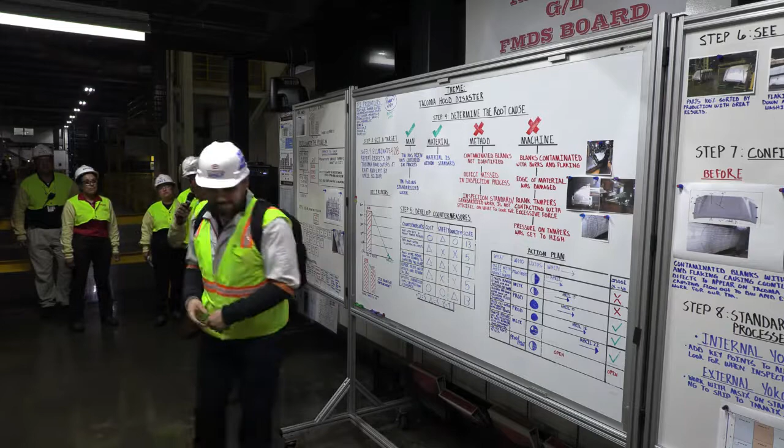My name is Roger Lopez, production group leader here in Stamping Shop. Our team safety commitment is we'll always be aware of our surroundings during Genchi Genbutsu activity, and always be aware of team members in the area.

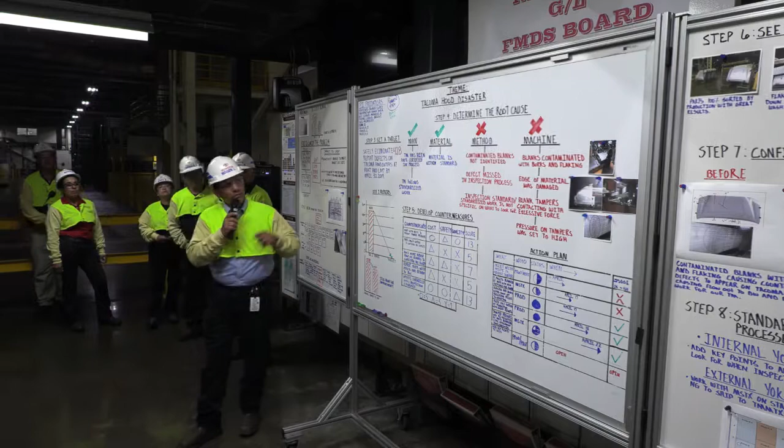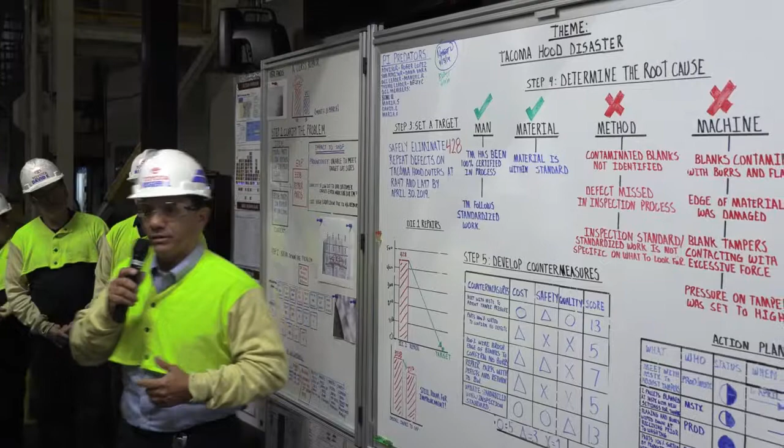So today our QCC, our quality circle name is PI Predators, and our theme is Tacoma Hood Disasters. This QCC was actually driven by team members on the floor. Our PI team member, which is the press inspection, is really involved with our repairs in the shop, and there was a slight concern about excessive repairs in a certain period of time. So we took a look at that and targeted our QCC in that direction.

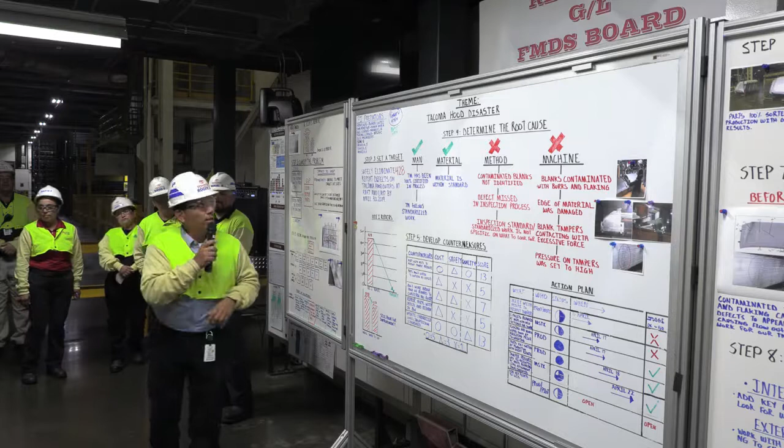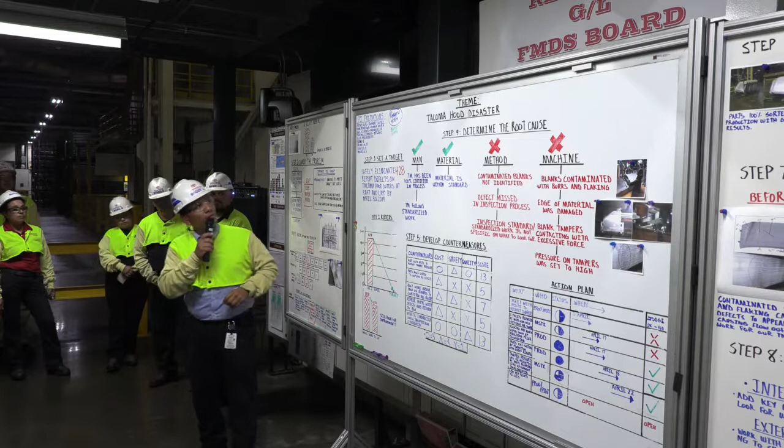Having said that, our team, myself, like I said, is the advisor. We had our sub-advisor, Dana Vada, who's our other group leader. QCC leader is Manuel Angel. Our theme leader is Becky Calderon, who could not be here today, she had to go on a family emergency. So Manuel volunteered to take her slides to report out, so thank you, Manuel, for that. QCC members are Ronnie Uvedo, Maria Zambrano, David Espinosa, and Maria Felitello.

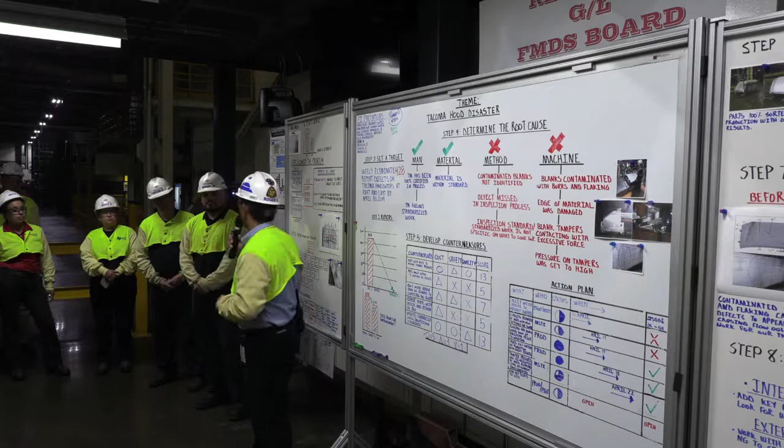So with that, I'll go ahead and turn it over to Manuel to go ahead and kick off our QCC presentation. Thank you, Roger. Good afternoon, thank you for being here for our QCC.

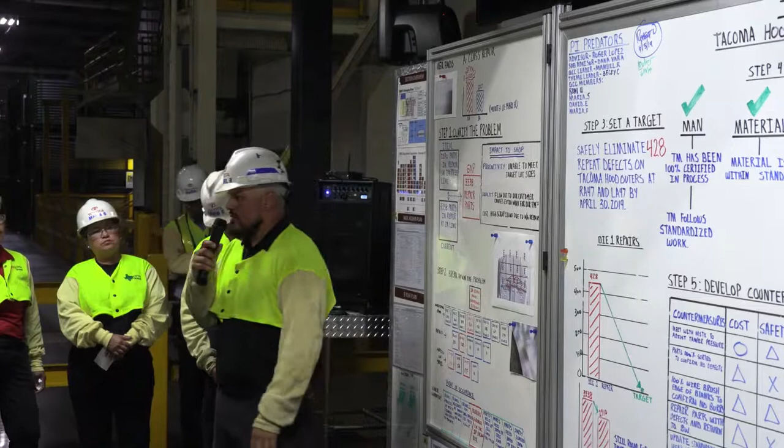So like Roger said, this is team member driven, right? So what we noticed is our 2A and 3A repairs were really high in the shop. Here we have our 2A repair, 3,338 panels in repair. Our 3A repair was 2,827 panels. So we're going to attack our highest hitter, which is our 2A repair, 3,338 panels.

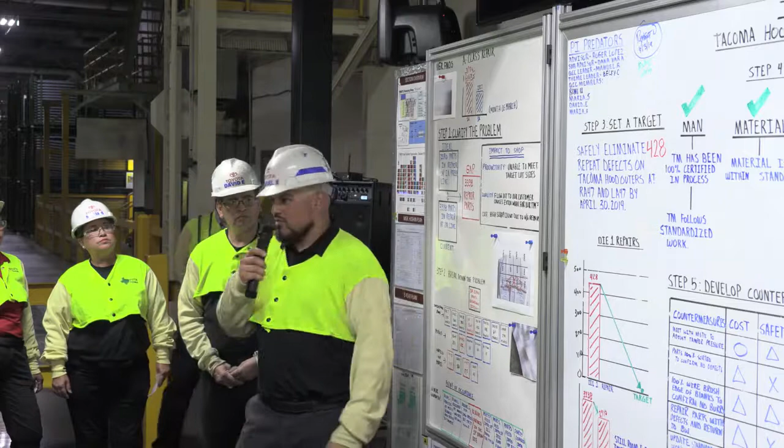Moving on to step one, clarifying the problem. Currently, ideal, we want 0 parts in repair on 2A press line. Currently, we have 3,338 parts, which leaves us a gap of 3,338 parts. Impact to the shop: our productivity, we're unable to meet target lot sizes. Quality flows out to our customers, causing extra work for our team members. Cost: high scrap count due to no-good repairs.

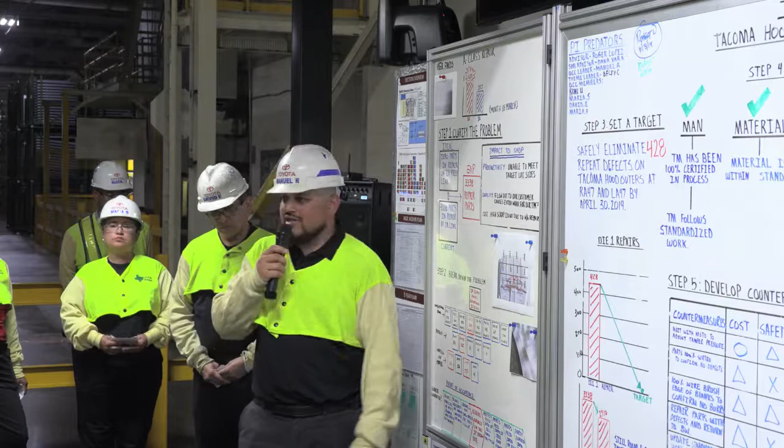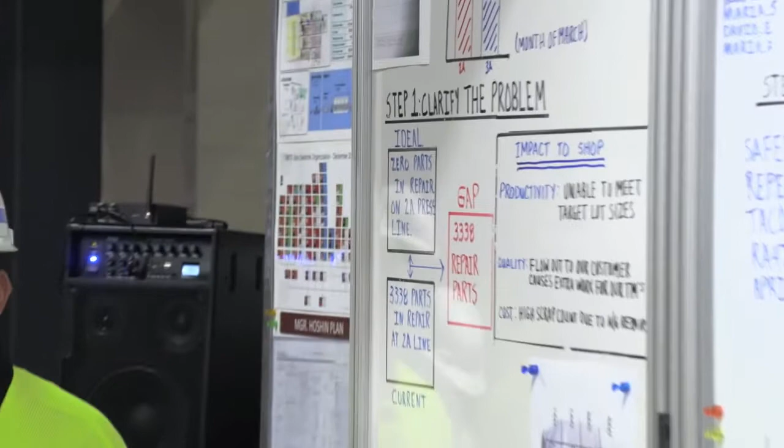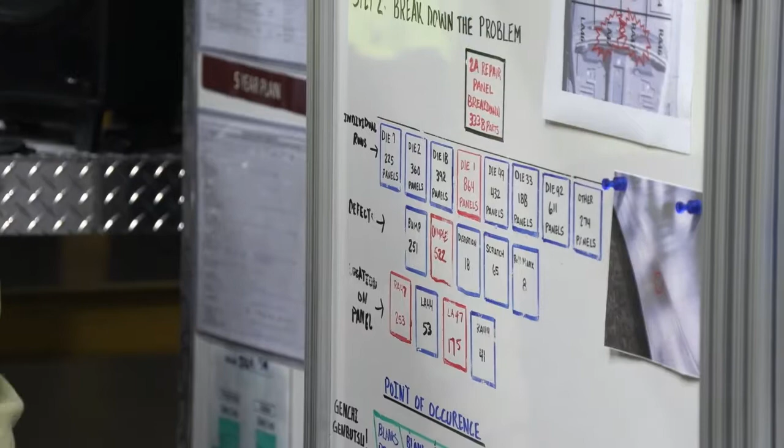Moving on to step two, breaking down the problem. As I mentioned, our 2A repair panel breakdown is 3,338 parts. We broke that down into individual runs. We noticed our highest hitter was actually die one, which is our Tacoma Hood outer, at 864 panels in repair. So we broke it down even further into actual defects appearing on the panel: bumps, dimples, distortions, scratches, and roll marks. Our high hitter was actually our dimples at 522 panels on Tacoma Hoods.

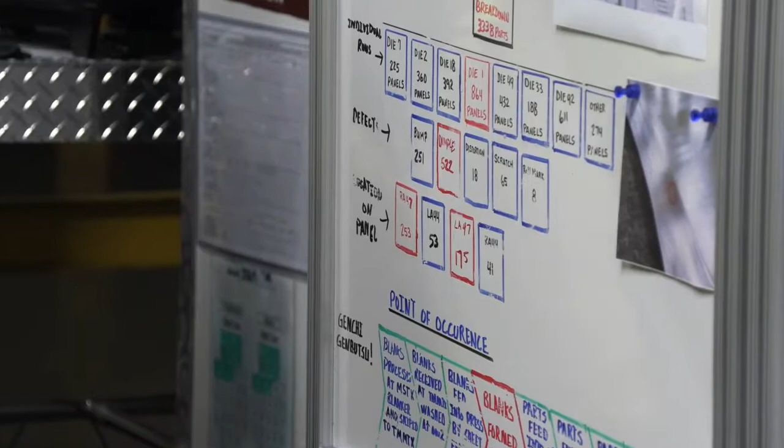We took it a step further and went for the actual location on the panel where these defects were appearing. We had RA47 and LA47 at 253 and 175. If you notice right here on our graph, these are our locations on the panel where we're getting these defects on the Tacoma Hood.

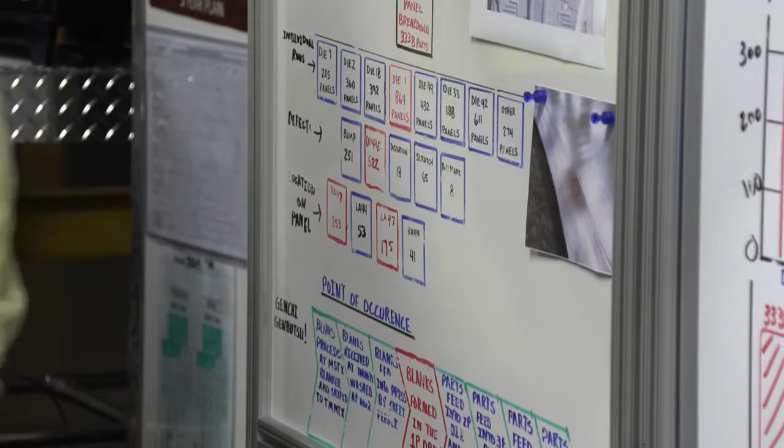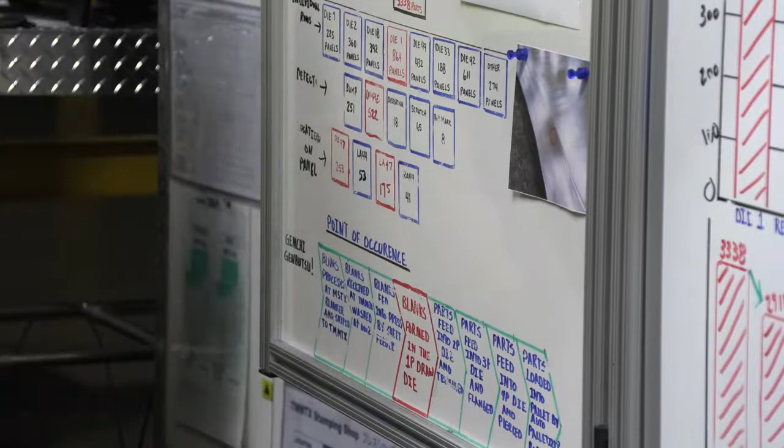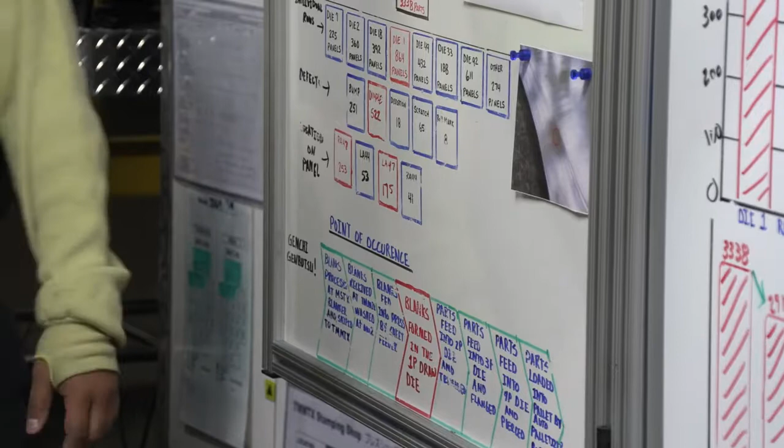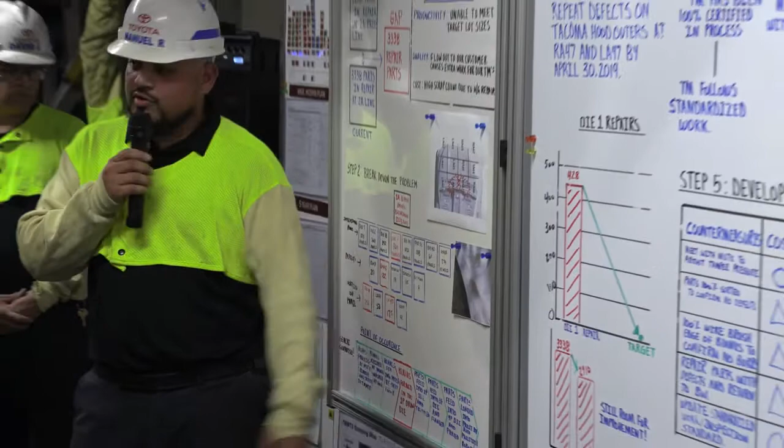Moving on to our point of occurrence. The first thing we did, we went to the blanking process at MSTX blanking line, which is Millennium Steel, our on-site supplier. Next, we went to our blank receiving at TMMTX and wash at AW2. After that, we went to the blank being fed onto our sheet feeder. Next, we had our blanks formed in our 1P draw die. After that, we went to our parts being fed into the 2P draw die, 2P trim. Next, we went to our 3P, 4P, and last but not least, our parts being loaded onto our pallets by our auto palletizer.

So after using Genchi Genbutsu, we were able to find our point of occurrence was when our blanks are being formed in our 1P draw die. Now I'll hand it over to David for step 3.

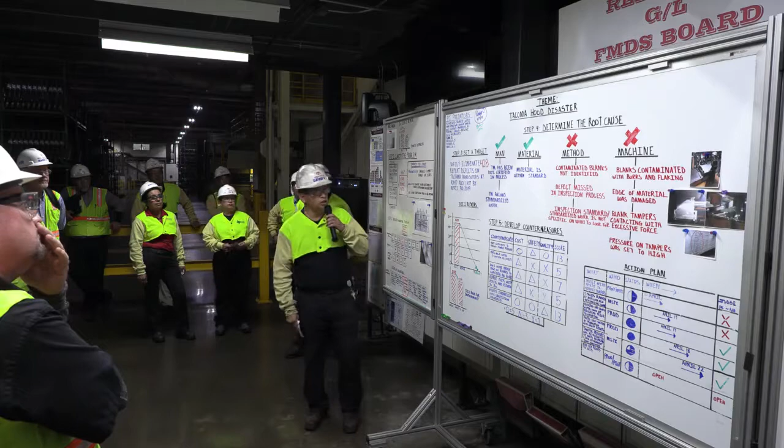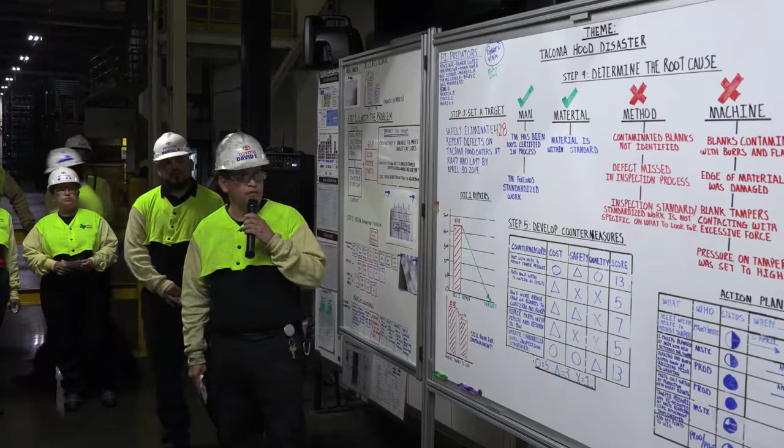Good afternoon. Step 3, set a target. We did: to safely eliminate 428 repeat defects on Tacoma Hood outer, by location RA47 and LA47, by April 30th, 2019. On die 1 repairs, from 428 parts, we're bringing it down to 0. 0 is our target.

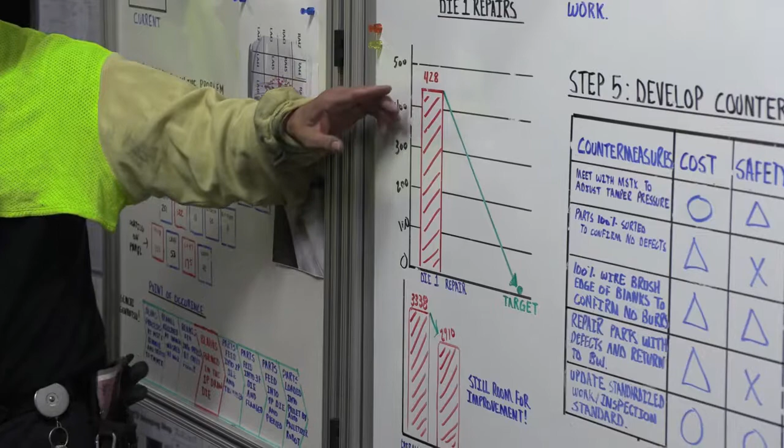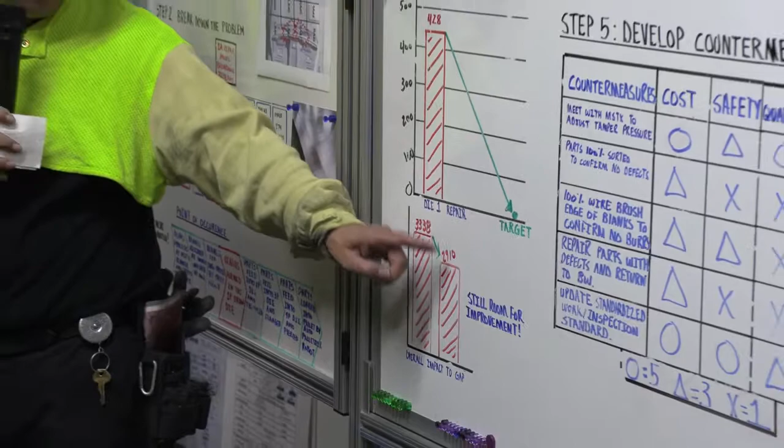Overall impact to gap is from 3,338 down to 2,910 parts, and that's just under 13%.

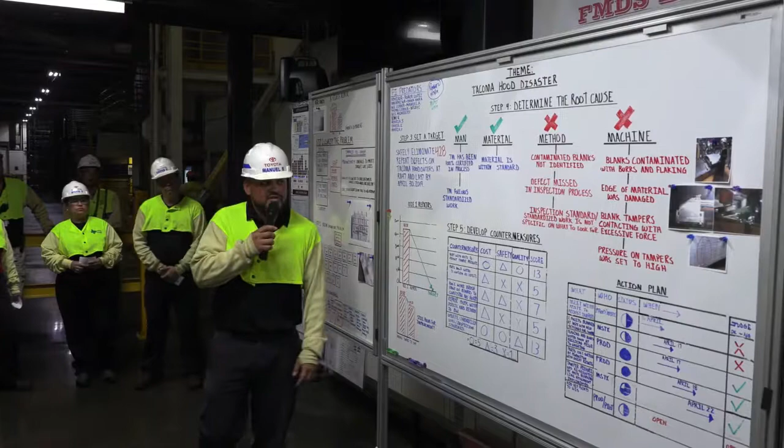So of course we went with our 4 M's. The first one we have is our man. All team members are 100% certified in the process. Next, we looked at our team members following standardized work, and that was good as well.

Next, we move on to our material. So our material is within standard.

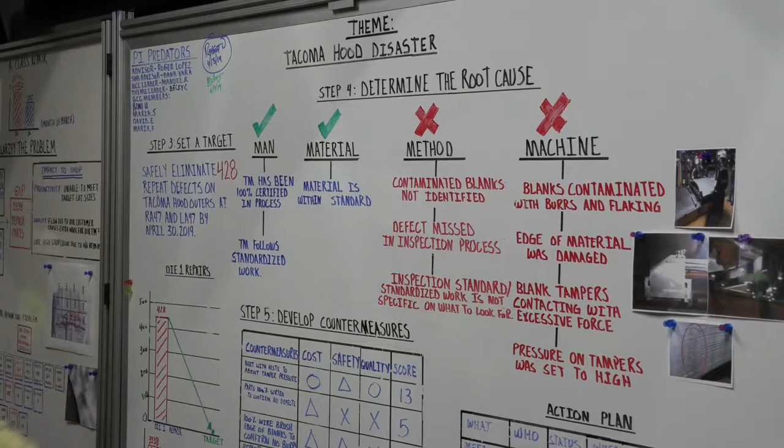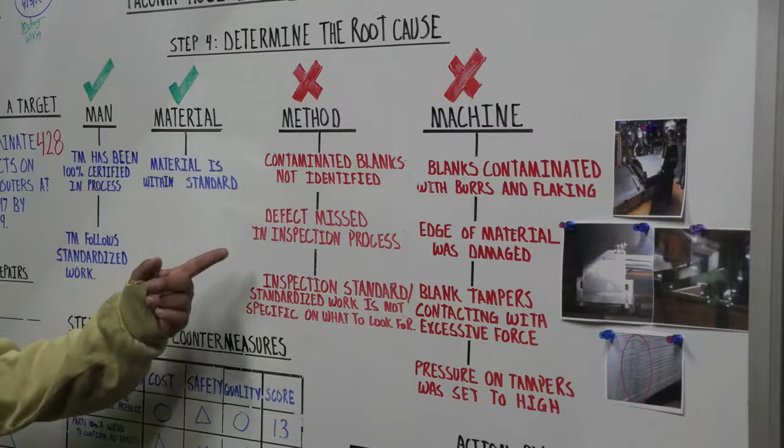Next, we move to our method. So we did find that we had contaminated blanks not identified. Why was that happening? Because the defects were missed in the inspection process. Why did that happen? Because the inspection standards / standardized work was not specific on what to look for.

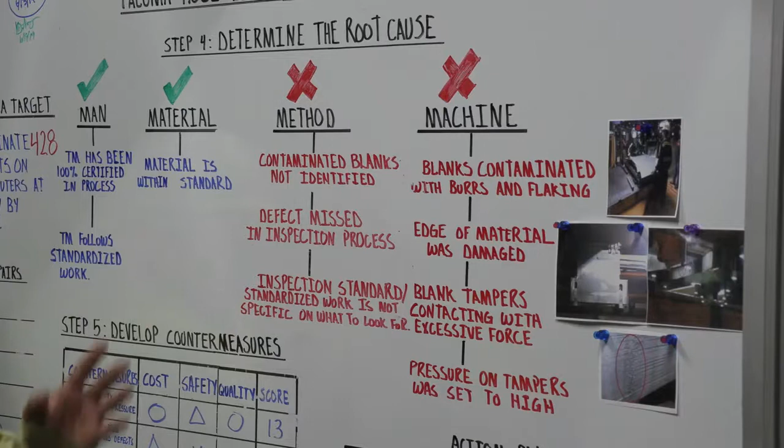So now that we stopped there, we took it a step further, and we actually went to our machine, which is at MSTX, our blanking line at Millennium Steel. And we noticed that our blanks were contaminated with burrs and flaking.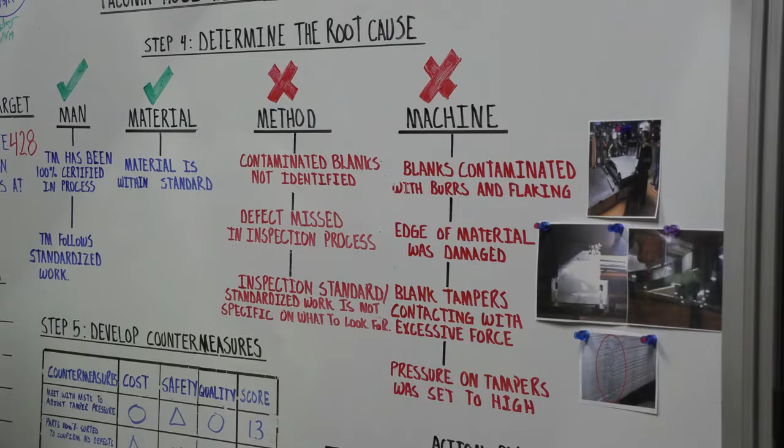Why did that happen? Because the edge of the material was damaged. Why was that happening? Because the blanking tampers contacted with excessive force. Why did that happen? Because the pressure on the tampers was set too high.

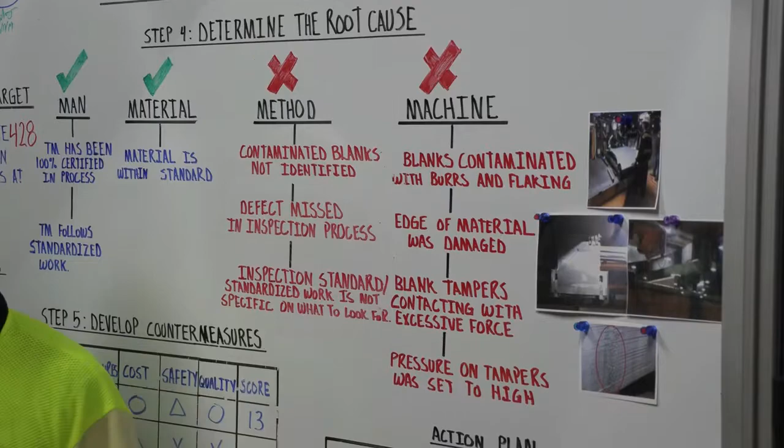So when I say blanking tampers, what I'm talking about is this flat surface right here coming in contact with the radius of our hoods.

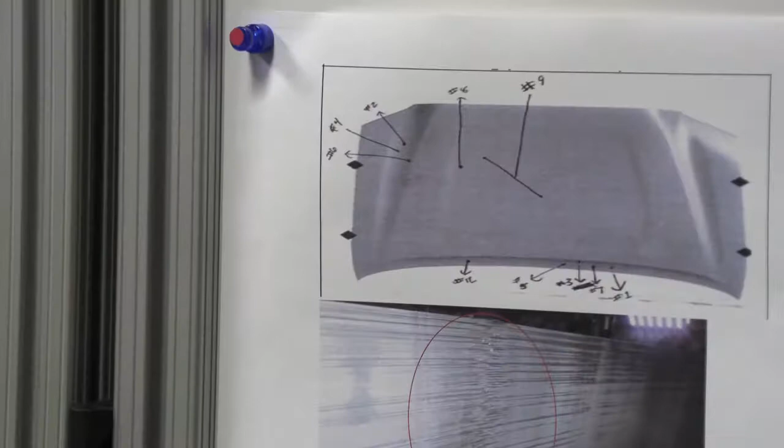If you notice on our diagram here, we have a small radius on the Tacoma hoods. So basically what this does is when those are getting blanked out, this tamper is coming in contact with excessive force causing our burrs and flaking on the blanks.

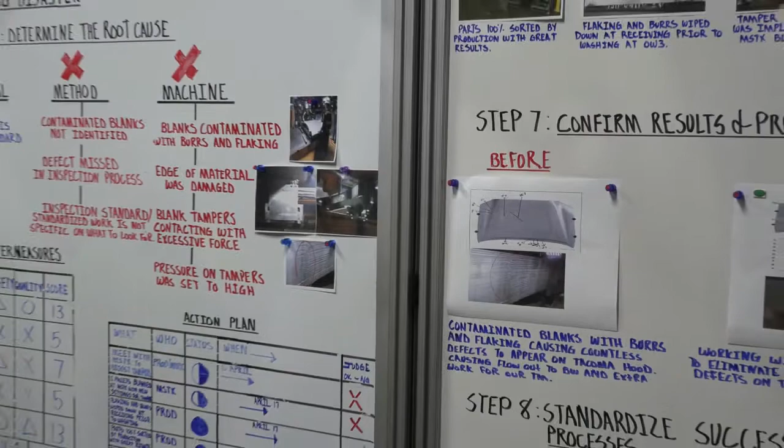Next, we're going to move to developing countermeasures. So we came up with the countermeasure chart with the scoring system. The first countermeasure we did was meet with MSTX, of course, to adjust the tamper pressure. That scored at a 13.

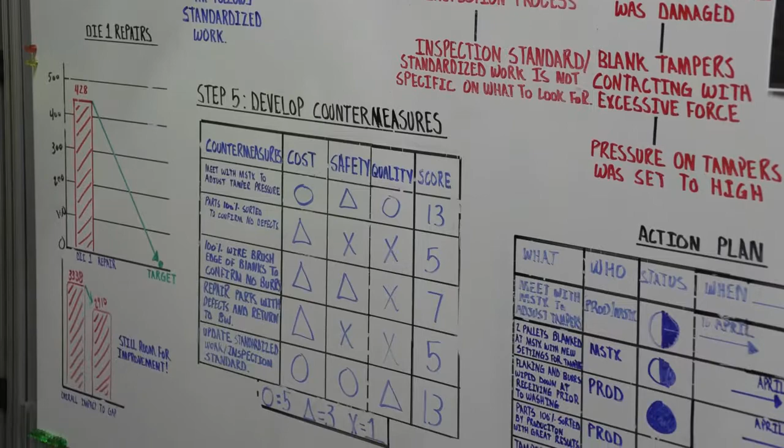Next, we had parts 100% sorted and confirmed with no defects. That scored at a 5. After that, we did a 100% sort with wire brushed edge of the blanks and confirmed we had no burrs. After that, we had repaired parts

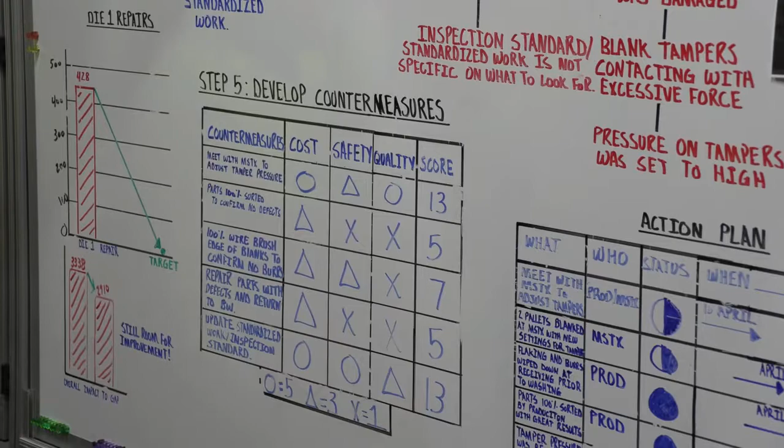with defects and returned to body weld. That scored at a low of 7. Last one we have is our updated standardized work / standard inspection standards, and that scored at a 13.

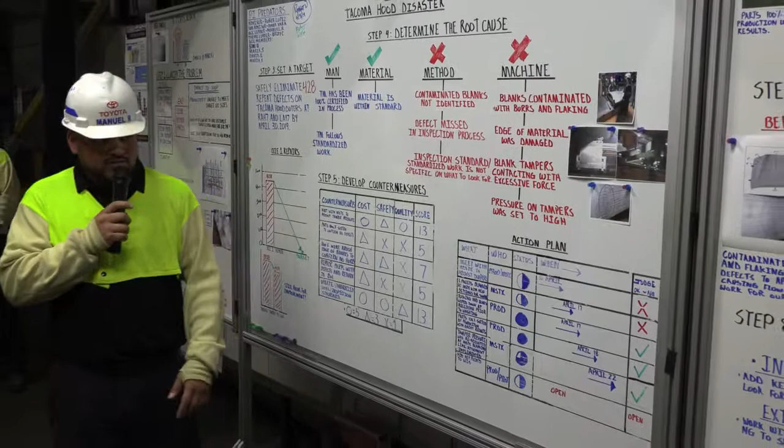Moving on to our action plan. The first thing we did, like I said, we met with MSTX, Millennium Steel, to adjust the tamper pressure. That was done on April 16th, and that was the first time that we went over there for trial.

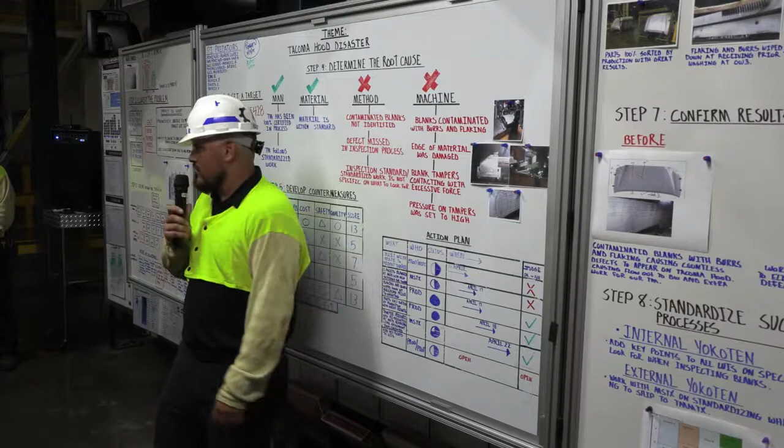Next, we had 2 pallets being blanked out at MSTX with the new settings that we did for the tampers. So like I said, that was the first time we went over there. That was done on April 17th. And we did receive these blanks still with burrs and flaking on them.

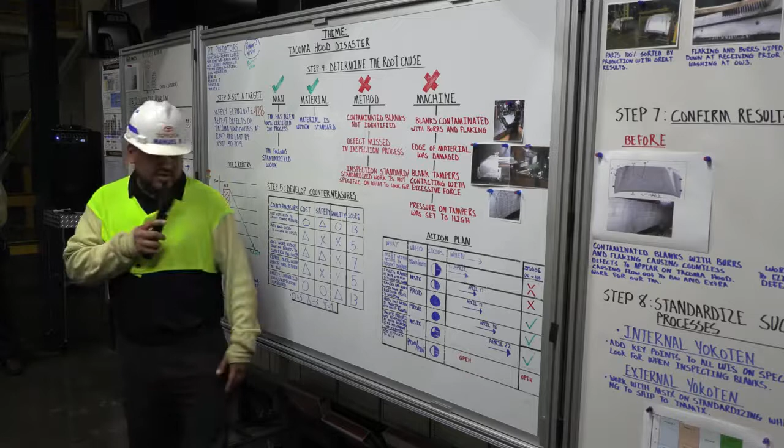Which leads us to our next one. We were able to come up with our flaking and burrs wiped down at receiving prior to being washed at OW3. So we did receive those blanks.

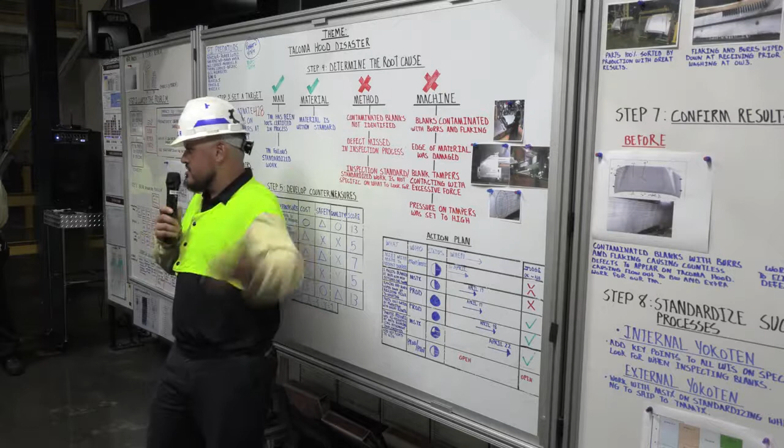They came into our receiving process, and we used the wire brush to brush off those flakes and burrs to confirm they didn't have them on their blanks. Which leads us to our next one.

We did 100% sort on those specific pallets, those 2 pallets, and we did receive great results with quality. That was done on April 18th.

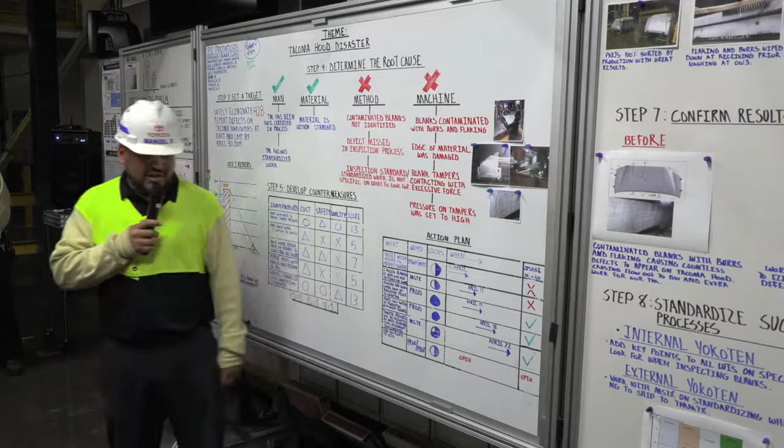Last, we had our tamper pressure readjusted the second time we went to MSTX for a trial. And MSTX blanking line attachment was implemented. That was done on April 22nd.

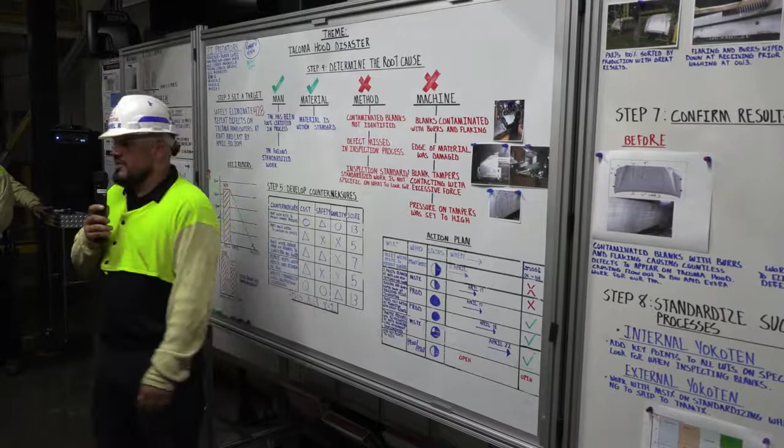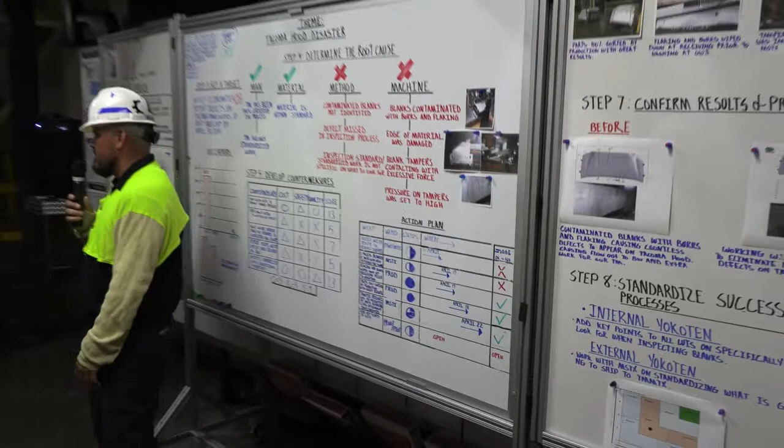And the last one we had was add key points to our WISs. And we are working with Pilot currently, and that's still an open item to get our WISs up to standard for those blanking lines. So moving on to step 6, seeing countermeasures through.

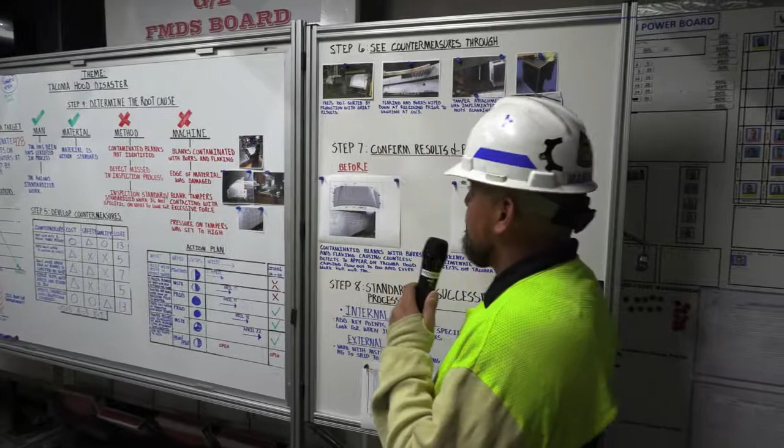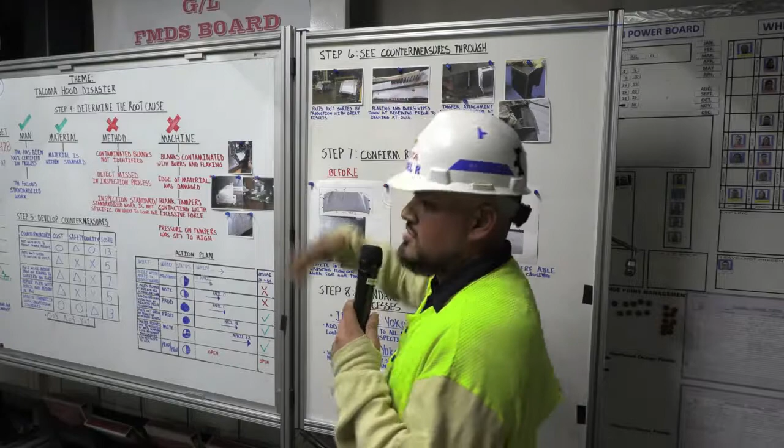So like I did mention, we did sort 100% on our parts, and we did receive results in very, very good for quality. Like I mentioned before as well, flaking and burrs wiped down at receiving prior to being washed at OW3. So we did use these wire brushes to eliminate the flaking and burrs.

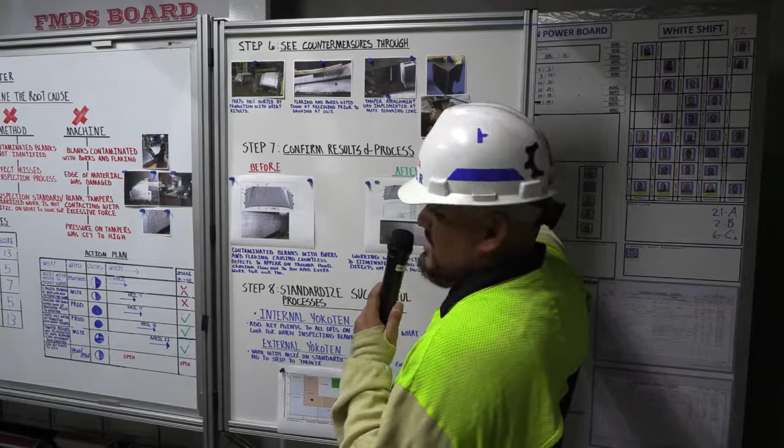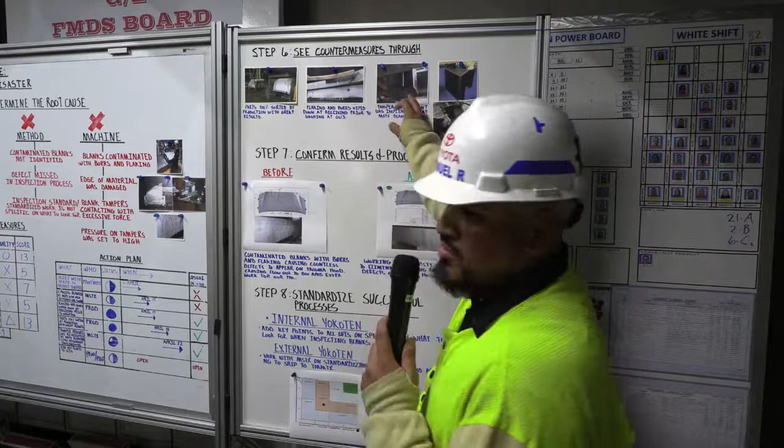Next, we have our tamper attachment implemented at MSTX. So when I say a tamper attachment, basically it's an attachment that goes onto these tampers. It locks onto that tamper. Like I mentioned before, it does have a radius on it, so instead of the flat surface hitting, it matches up with the radius of the hoods, causing no flakes and burrs coming to our shop.

Next, I'll hand it over to Maria for step 7.

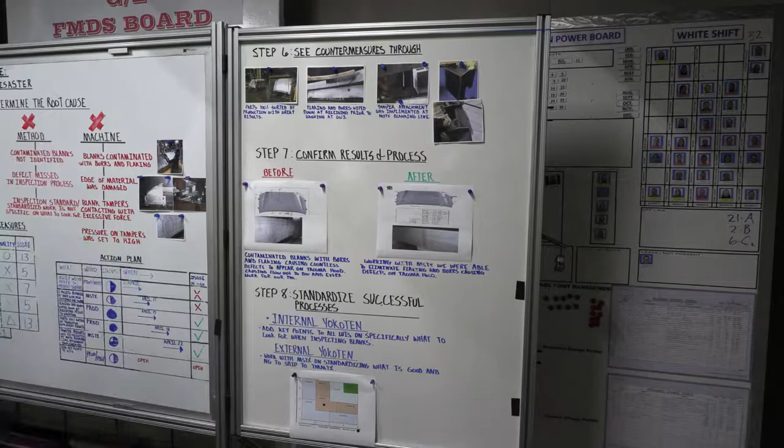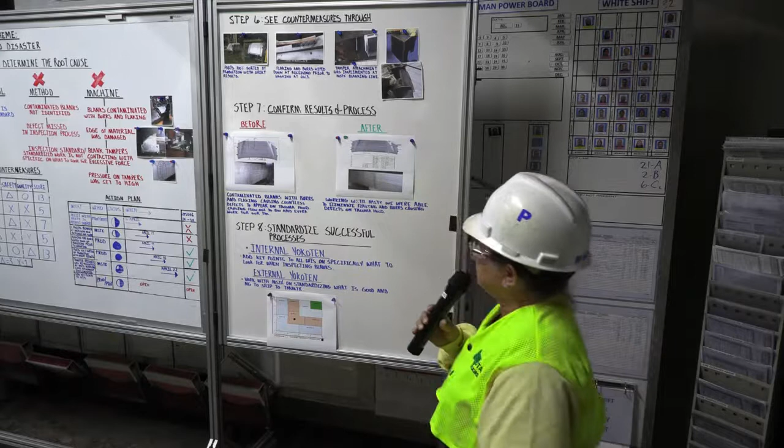So step 7, confirm results and process. Before, we had contaminated blanks with burrs and flaking, causing countless defects to appear on our Tacoma hood. It also caused flow out to body weld, which is extra work for our team members. Afterwards, working with MSTX, we were able to eliminate flaking and burrs causing defects on our Tacoma.

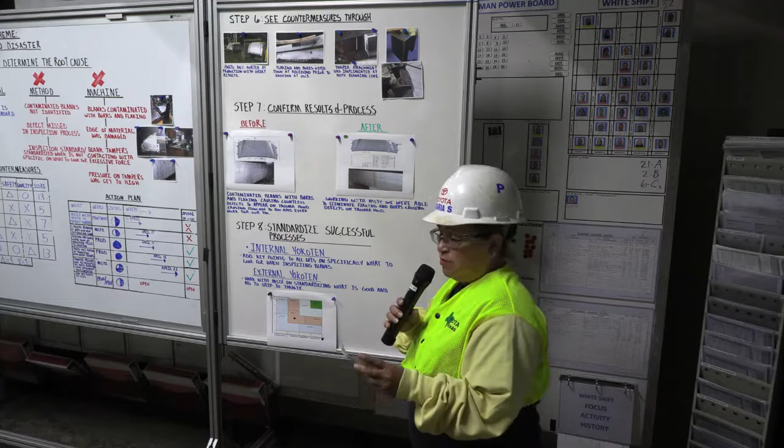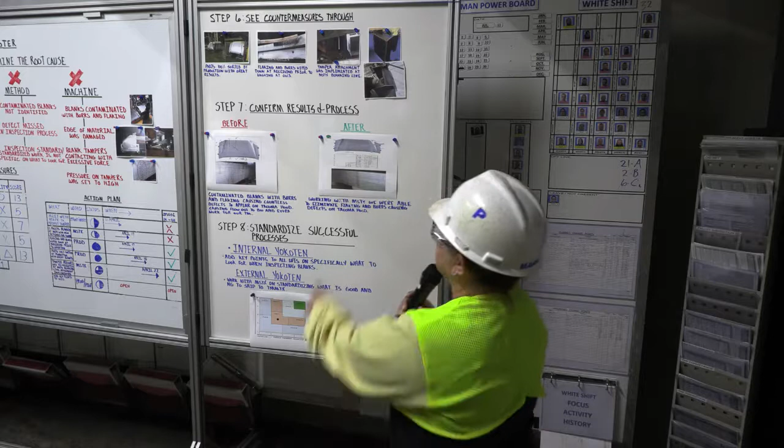Before, as you can see, our Tacoma hood was highly impacted by defects, but after our countermeasures were implemented, our results were very, very good.

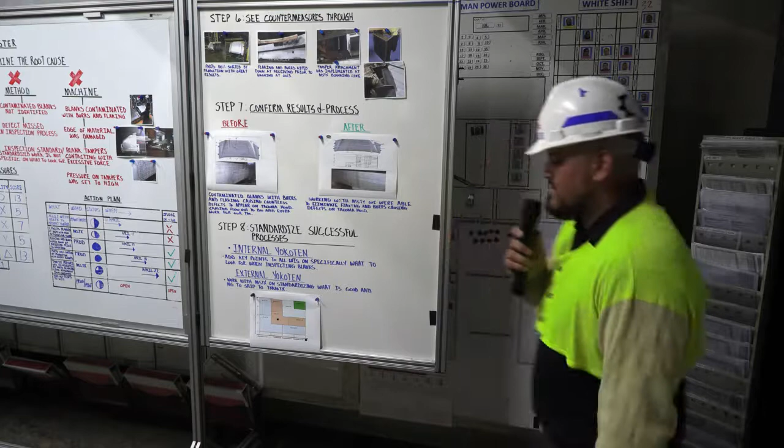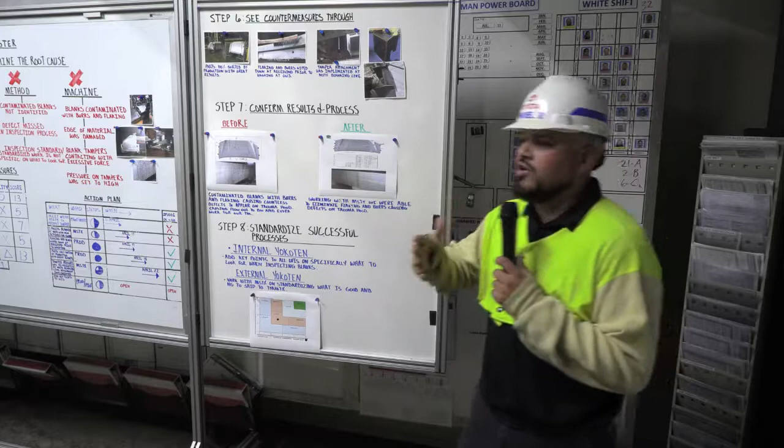Thank you, Maria. Now moving on to step 8, standardizing the successful process. For our internal Yokoten, we want to add key points to all our WISs on specifically what to look for when inspecting these blanks. Not only that, but we want to add a chart showing what's good and what's no good to ship back to Millennium Steel, or what we can receive in the shop.

For external Yokoten, we want to work with MSTX to standardize what is good or no good to ship to TMMTX. So we want to do that over there.

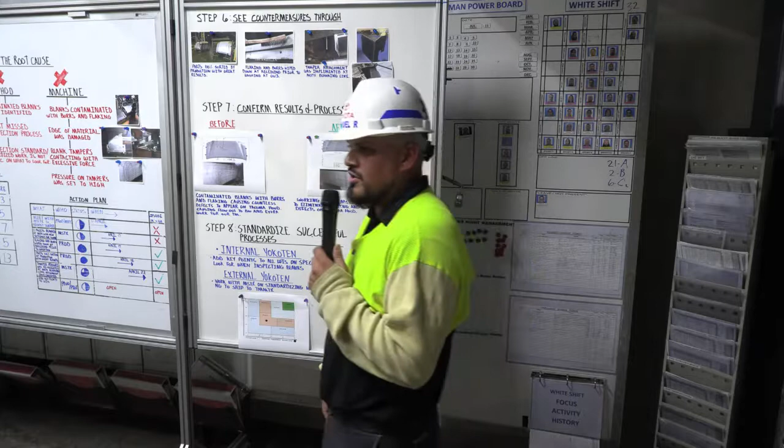Not only are we doing that, but we're actually preparing for a big project coming up in the next couple of years, which is aluminum. This Tacoma hood is the closest thing we have to aluminum in terms of how soft the material is. So we're getting a jump start on that, and we're getting Millennium Steel a jump start as well. They're very excited to work with us to get ahead of the game for the aluminum coming up in the near future.

Reflection chart: before we started this 8-step process with our QCC, we were at a zone D. After that, we moved to a zone C for our team.

My personal reflection on this QCC, this being my first lead on a QCC, is that I was able to help my team members and team leaders understand the 8-step process. Working with Millennium Steel was really big for us. Like Roger said, it was a difficult task going back and forth, but they were very excited to work with us as far as preparing for the aluminum coming up in the near future.

Now I'll hand it over to Maria for her reflection.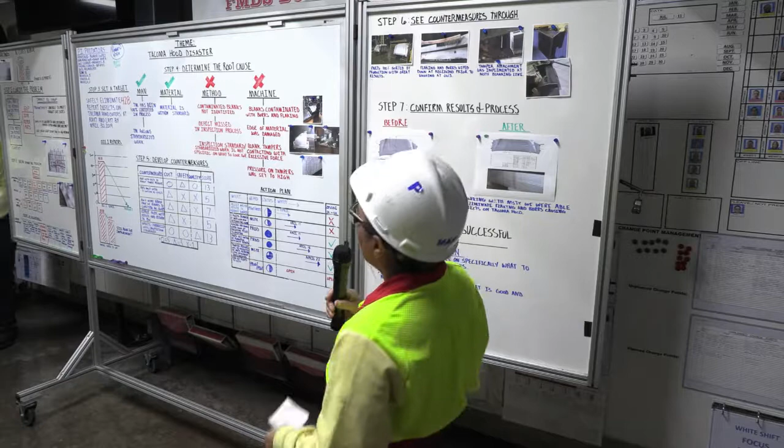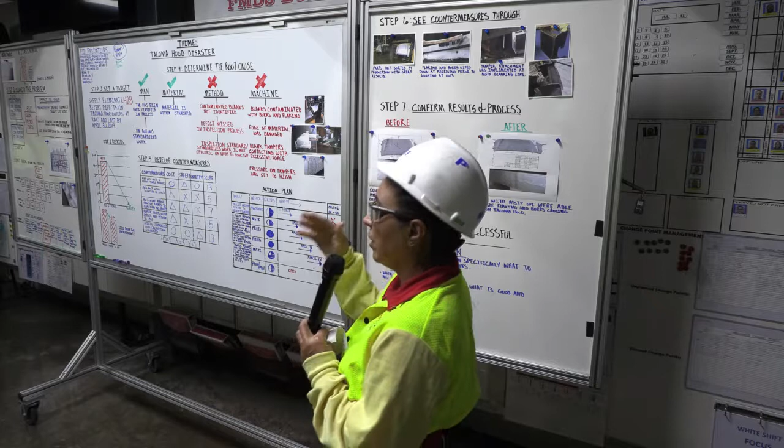Hi, my name is Maria Filoteo. I'm a PI, so my reflection is I learned about the 8-step process. After that, I saw in my area that defects went down in repair, so that means very good. I'm very happy to work with my team. Thank you very much, happy.

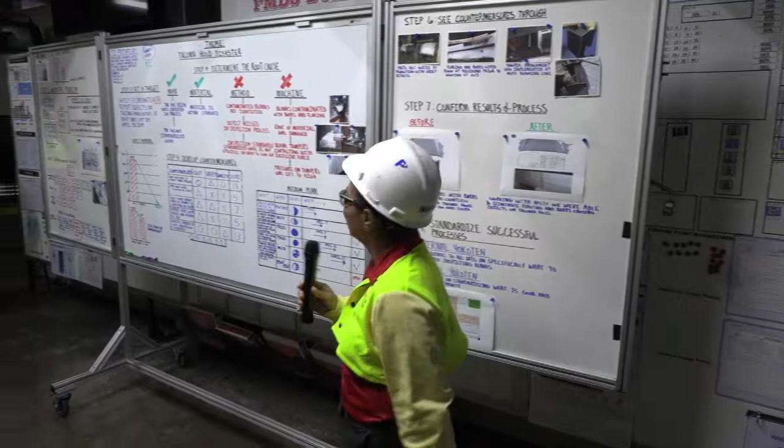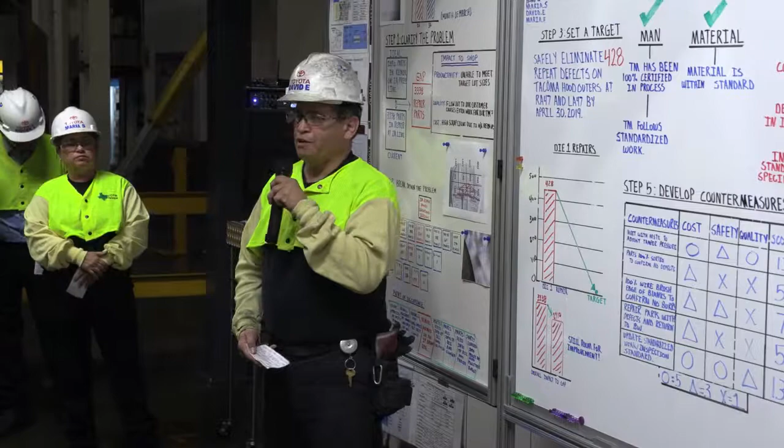David: Hello, my name is David. Because I'm a press inspector, we see a lot of parts that have to be repaired. With this 8-step process, to me it means we'll be doing less repairing and more shipping out quality parts to our customers. Thank you.

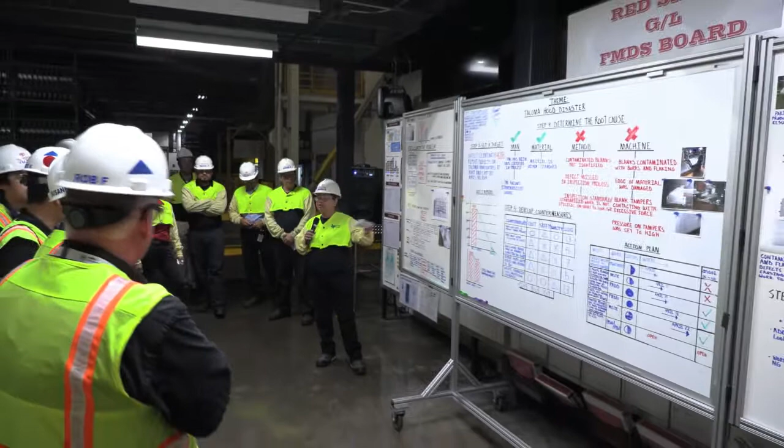My personal reflection is that by having quality circles like the one we just presented to y'all, we will have less downtime on the presses, less defects on our panels, and less overtime on our team members. So the good thing is presses will have no downtime, the team members are good, and our plant will be very good.

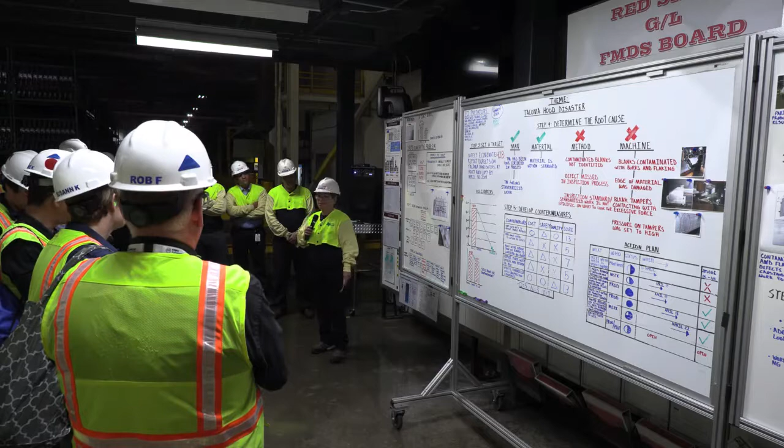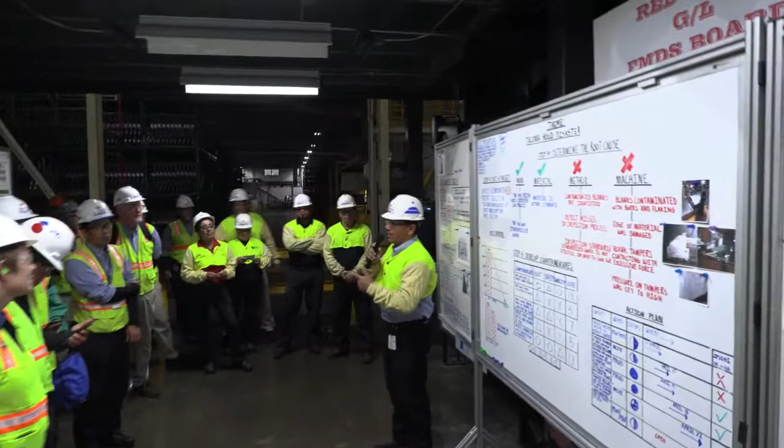In the past there's always been that feeling of 'we got to do another QCC,' but as these team members get involved, the next question becomes, hey, when are we going to get involved with our next QCC, or what are we going after next? It was a very good experience to see these team members progress in this QCC, so I'm very happy to see that. This concludes our QCC report out, and I'll open it up to any questions they may have.